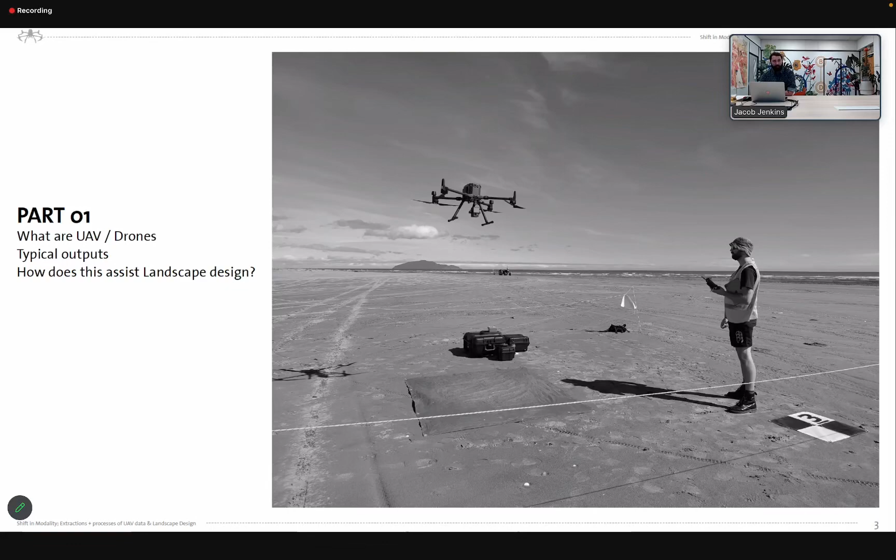So what is a UAV and what is photogrammetry? You'll probably see lots of pretty pictures of drones. These are some of the flying 'big boys' that I've used - a fixed wing drone that we used at previous work, all the way down to smaller Mavic units. So UAV stands for an unmanned aerial vehicle, more commonly known as a drone.

The drone has the ability to fly itself on automated, predetermined flight plans with given distances and heights at incredible accuracy, much more capable than us humans could ever hope to dream of. It can be instructed to do all of these things, and can capture targets for various outputs.

As I mentioned before, right from typical cameras, multispectral, which is basically a normal camera split into color ranges, more for plant work, and then right into LiDAR, which is light detection and ranging - a laser scanner which essentially allows much more detail than you can gather from photogrammetry. You can then convert these outputs into various 2D and 3D geolocated outputs useful for projects.

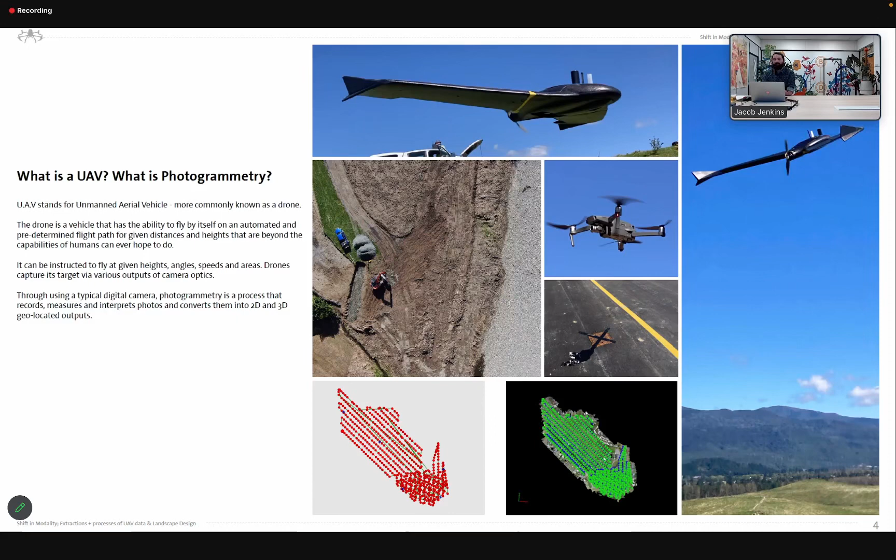So what is typically produced? From photogrammetry, you can see on the left a series of photos that are produced from the drone when you fly over a site. You get an orthomosaic or aerial map, very similar to satellite imagery, that's stitched together to give you an updated aerial view of your project.

You'll also get a 3D mesh, with various uses for that. Myself particularly, I don't personally use it too much, but if you're the kind of person who loves using meshes for various processes, that's very useful there.

There's a rendered point cloud - so in the name, it's a cloud made out of millions and millions of points, and I'm not joking on that, it is millions. They tend to be quite big databases, but hold incredible value of data, depending on what kind of modules you're using. It doesn't just hold color or RGB significance, the true color we see with our eyes - it can also hold other information, classifications of what's ground, what's tree, what's road, what's water, and other pieces of information such as elevation.

And then there's also DSMs or DTMs, digital surface models and digital terrain models. This is all mainly derived based off the point cloud through a series of processes that will give us ground surfaces and also just a surface in general. And then from that, we can also generate typical contour information, useful for representing mapping aspects.

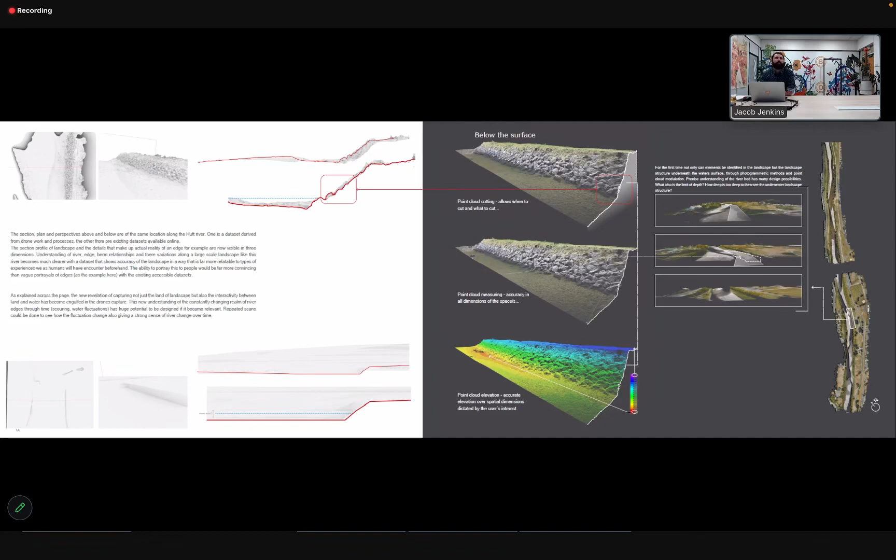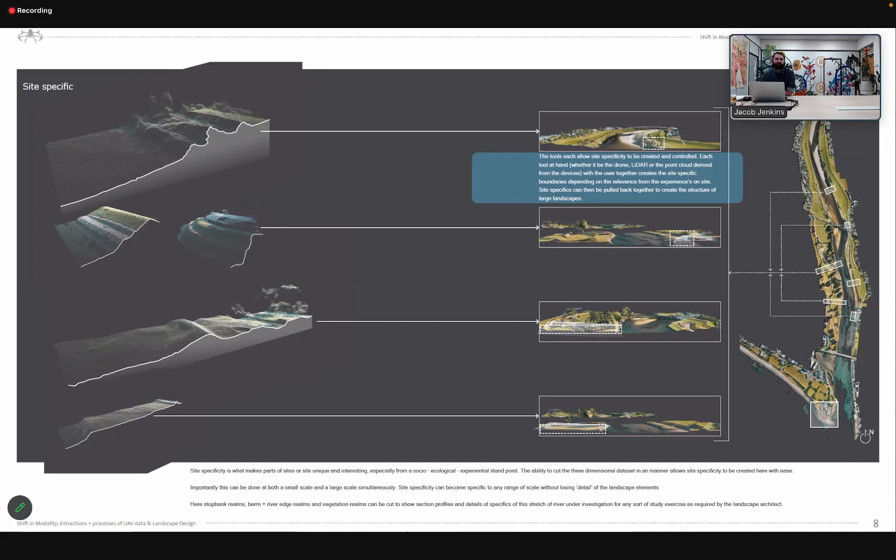So again, you can be very site specific. You can range from a large area right down to a small area of what you're particularly looking for, which means you can start to pull out some of the interesting bits that are particularly important for a project - could be landform, could be rivers, in this case could be riverside, experiences and qualities and various others. We'll go into further detail on how all those work.

So why drones, why landscape? I'd argue drones have been around for a while now and they've developed into highly sophisticated technologies. They have a lot of uses in various fields, as well as in landscape architecture. I would personally argue that the landscape discipline has a natural calling to the usage of drones. They allow us to capture and map the landscape realms.

Oops, sorry, the TV's warning it's going to turn off. I don't want it to do that.

As I say, they allow us to capture the landscape with mappings and 3D outputs associated with drone operations - easily an asset to landscape, point clouds, aerials, contour information, etc. So the majority of the time, especially professionally or commercially, drones and photogrammetry in landscape design tend to focus on visualization, because it's really good at doing that, and techno-scientific problems.

However, in contrast, I personally believe as a designer - and it was deemed a major tendency that occurred in the field of landscape - that the drone has the potential to assist understanding large landscapes and human life on the ground together. Large landscapes are really difficult undertakings to wrap your head around.

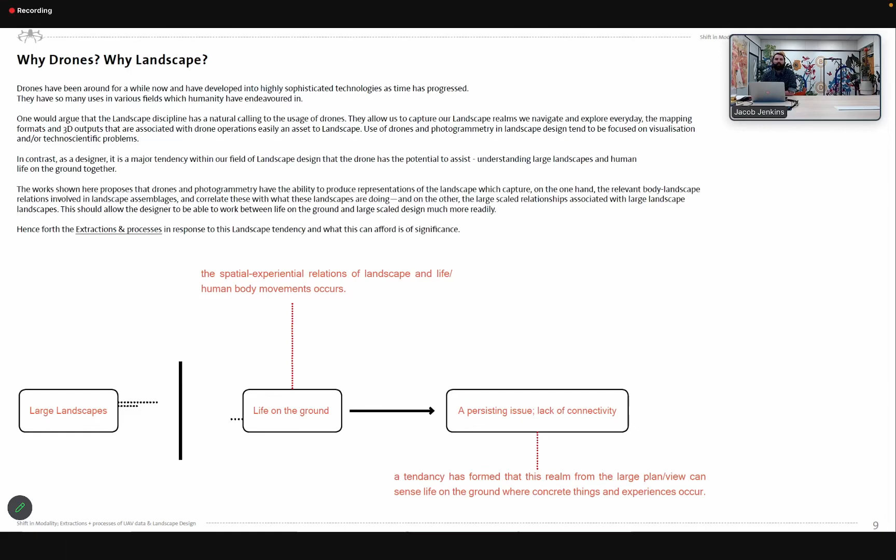So, is there another way? That was a key query when I was looking at this for my thesis. Something that will tackle the difficulty of understanding and forming mappings and representations of what happens on the ground, but for large landscapes. So is there potential for drones to do this?

The main value that the drone has is its ability to do both the small and the large. You can fly and survey kilometers of area within a day and have all of that data in aerial 2D outputs, 3D point clouds, etc. But you can also zoom into the finesse of the details, so you've got the ability to zoom between the two without losing accuracy and detail.

So critically, it's how can we then take that data and explore it with other conventional methods in landscape architecture, both analysis and design, to utilize that.

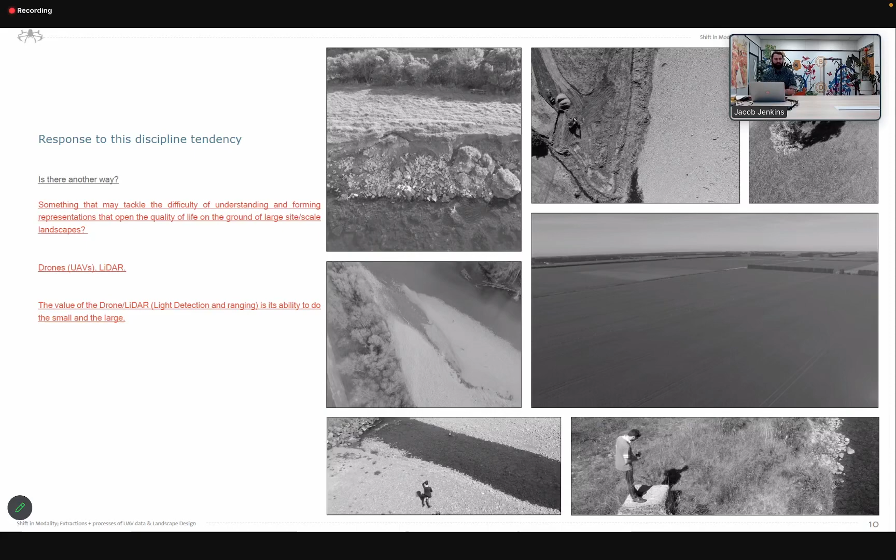So you might be thinking at this stage, it's all just pretty pictures and lots of clouds with points on it. But the main thing here is how the data from the drone can be extracted in a meaningful way, from what we extract from landscapes, especially dealing with the large and the bodily scale. So the following slides show a handful of extractions and processes that I think were pretty critical in understanding the site at hand, which I'll go through shortly.

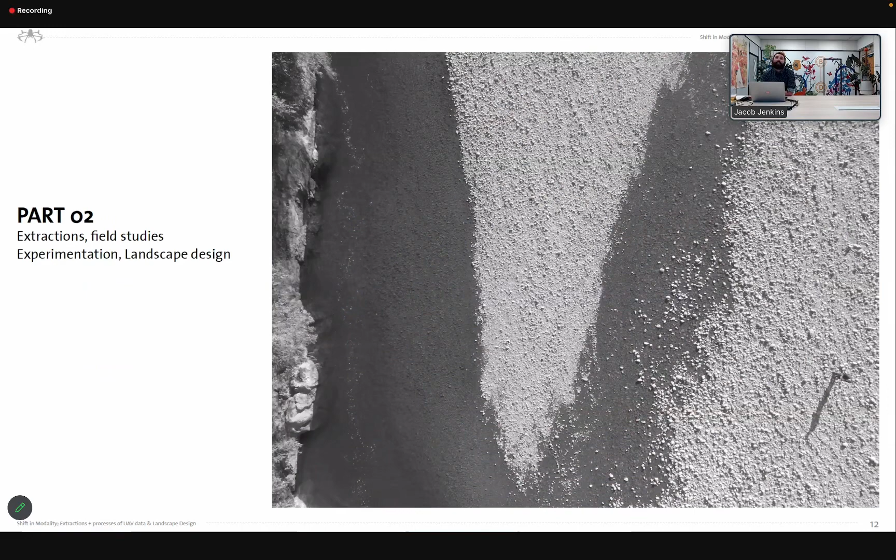So, part 2: extractions and field studies, followed by experimentation and landscape design. This is kind of the meat of everything here.

So the site that was chosen for this study was the Te Awa Kairangi, or the Hutt River. It's a braided river based in Lower Hutt and Upper Hutt, about a 10 and 20-minute drive north of Wellington. It's a massive riverscape that is used by lots of people every year.

If I recall, I think it has 1 million cyclist users every year because it's part of the Hutt River Trail. So this is a serious space where a lot of people use it as their escape from the city and suburbia, to get out and about.

So why riverscape? Riverscapes are large pieces of landscape that we experience on a daily basis. They incorporate both big and small scales, as it's a space that is consistently changing with vegetation, movements, bumpy things, technical aspects, flooding, spatial areas, ecologies, and a general change of movement over time.

It just seemed the perfect site to really start testing whether the drone would assist in understanding these nuances of river scapes, the pulls and shifts of the landforms, things like trees and rocks, views, orientations - those really bodily related items.

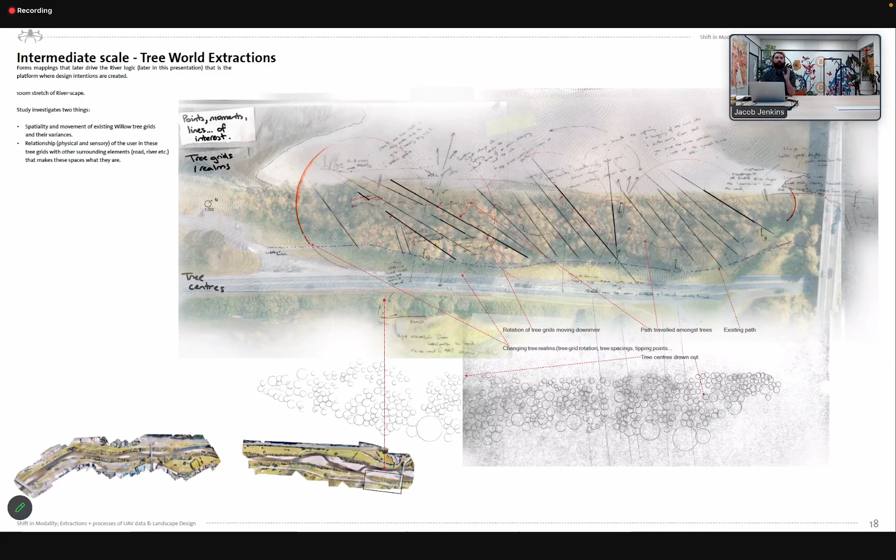And so that, together with typical standard field studies, usage of photos, diagramming, understanding where the edges and shifts change, actually started to reveal some typicalness of a certain kind of tree world, grid size, angles, etc., that made a certain kind of movement through those spaces.

So you can see here, there's the edge of the trees on the riverside. Only here the river can be sensed, and it was very rare that the river could be sensed purely by itself, because things like the road and other aspects were highly dominant in this kind of space.

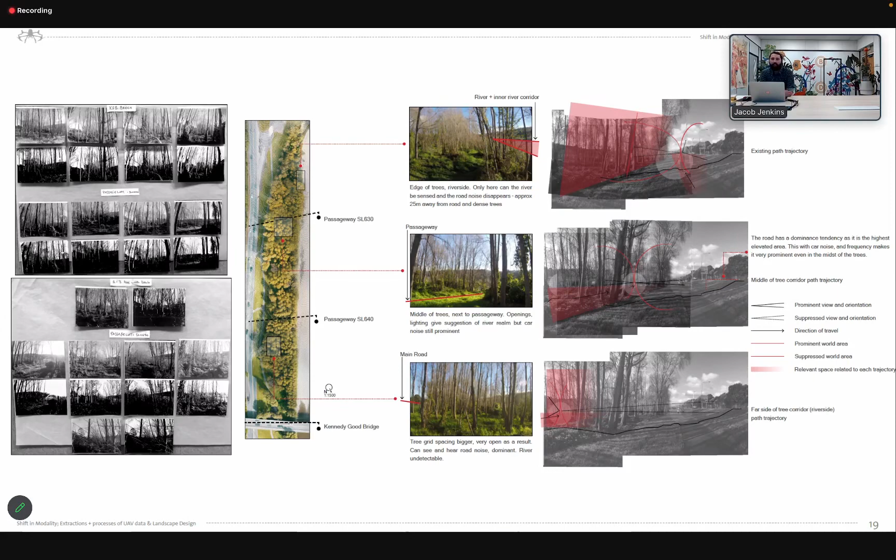So it was because the drone data detail allowed us into that. It helped us step into that world and actually start to extract those key things of what it was that made you, as a user, move through these spaces and what you got out of it.

So you can see on the left, the high detail that the drone imagery was gathering - each individual tree, canopy shadows, and the size of canopies, etc. You could start to feel where the clusters were tight and where there are openings. Whereas on the image on the right, the trees are much more grainy because the detail and accuracy just isn't there to the same level.

And so you'd be assuming much more in this example. So it was that ability to take the detailed drone material and start blending it in with field studies of what was being extracted from experiences, understanding those tree grids and worlds, and then trying to move it up to a larger scale to utilize what the drone data was giving, as well as what I was understanding this landscape did.

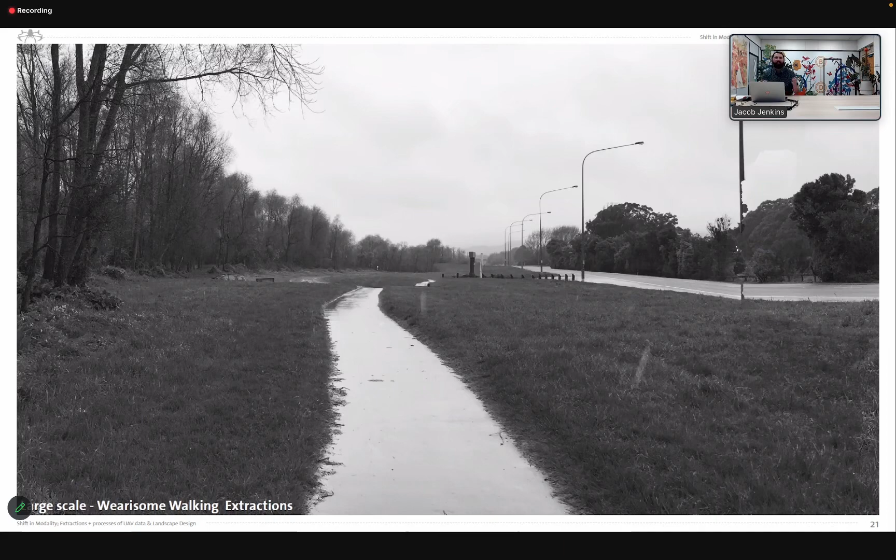So this is called the Wearisome walking. We've walked this space various times - I don't know how many kilometers Sean and I have clocked doing this - but this is one image at one end. As you can see, it's very standard: it's a pathway, there's some berm either side, there's a main road at 70 km/h, so it's a very dominant roading area. And you can see the path just gently meanders along - nothing really changes, trees to the left, road to the right.

Generally, you form a generalization that it's just the same all the way along: path, road, a bit of landform on either side, and some group of trees.

But what this was trying to understand was this wearisome kind of walking. You start to understand that the dominant road to your right-hand side is really there, noise channeling away, with a group of trees sometimes really thick, so you don't get a sense of the river. So you suddenly become autonomous, turning into an automatic mode as you travel down this space.

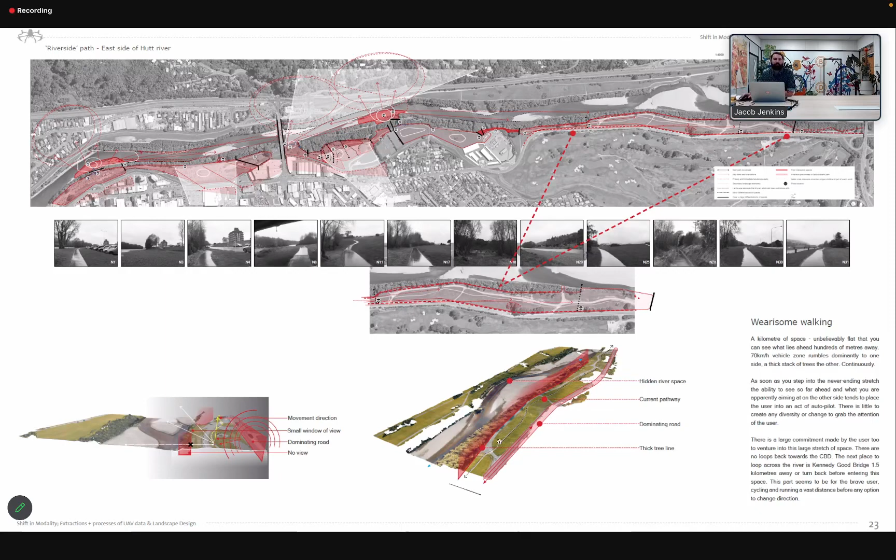There was more to that space that it could tap into to understand. There's the current pathway that meanders gently, with subtle shifts in the landform that move along, and the drone data helps pick that up—more useful at the design stage, which I'll go through shortly. But the drone material is also useful at a large scale, just to assist understanding those gentle topographical changes.

You can see with the point cloud 3D output here, it works as a great base to start diagramming over the top at that larger scale, pointing out that most of the time there's no view through to those tree areas into the river, but there are those subtle shifts in the landform. Understanding those subtle shifts—the landform moving just enough in height—means the noise of the road decreases significantly, and your senses activate more to the river or other aspects of it.

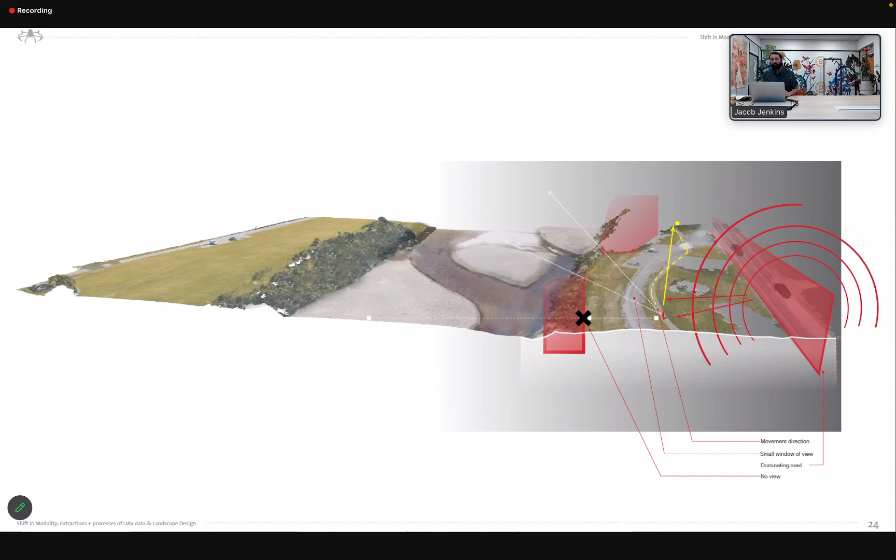So it really helped to diagram and show this at the larger scale, but also to undertake a similar process to the example beforehand, using the highly detailed information from the drone. Again, extractions of passageways, main grid tree angles and distinctions between them—where the trees would tighten up to a point where there was no way through to the river, or spread out enough that you could perhaps walk through, though it would be tricky, right to the point where it's really easy to walk through those spaces, or it's actually inviting to come down there.

You have passageways which are clear-cut alignments to the river, offering a moment to the river rather than the road and other things around you. It's about trying to extract all of those, but also understanding it by actually going through those spaces, documenting it with photos and diagrams. There are these moments of: can the road be seen? Can the road be heard? Can it be sensed? And can the river also be seen, heard, and sensed?

There are all these tipping points of certain tree grids, the densities, the type of trees, the length of grass you're walking through, the ground surface texture in general—that level of detail of the things around you that make you move through these spaces in a certain way, dictating how you move through that space.

Through these processes that were tested out, it became clear that the detail of the drone material, the clarity of textures, elements of the landscape at that bodily scale—trees in this particular example—were really a winner. It really helped extract those understandings of how those spaces seem to work, which would be crucial moving into the design.

But it's important that it doesn't do it just by itself. It's the integration of drone material and field studies, on-site experience through that spatial and temporal time, usage of photos, sketches, mappings, diagrams—anything that helps assist extracting the elements you're looking at. In this case, it all added up to extracting the logic of how this riverscape worked—the extraction of why and how the user experiences the site in a particular way—and that kind of bodily detail could then start to be understood over a large scale.

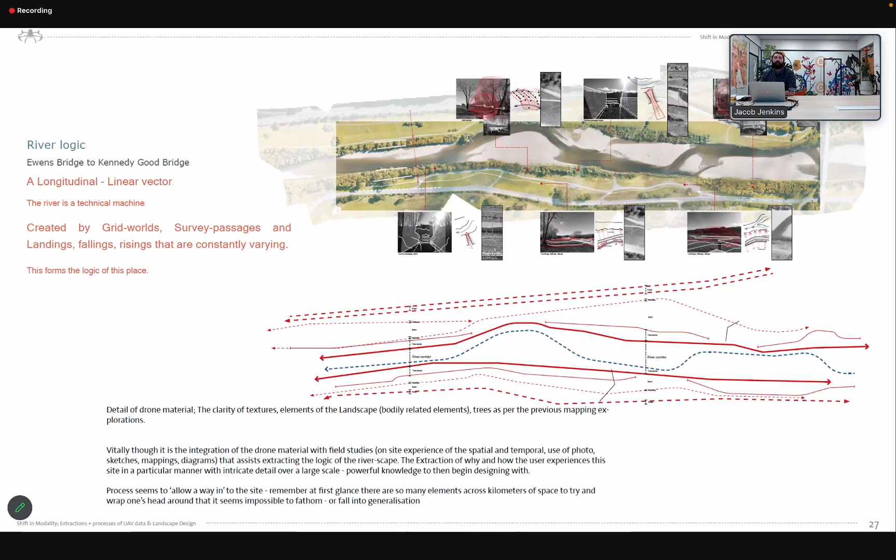But yet, moving through them in a spatial kind of aspect, they do create something. And so it's actually helped extract those out, and figure out what forms this place from a spatial perspective, not just a technical one.

So this was just kind of taking all of that and asking, okay, what's the design query? How can I play with those experiences? How can I really start to tweak and pull things like earthworks, those subtle shifts of what the landform does? How can I push them so it's quite contrasting, really starts to control someone's movement with earthworks, with trees, path movements, edges, stop banks.

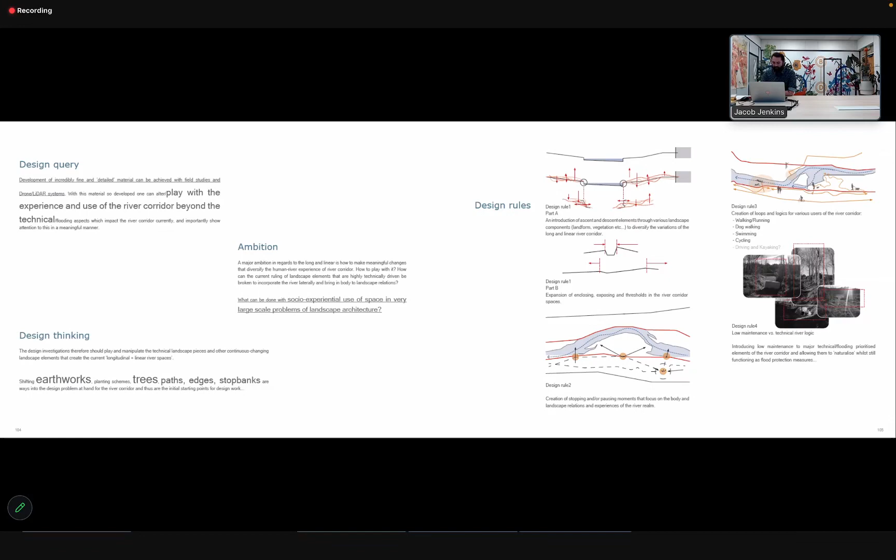How can it take all those things that have been extracted and put them into a design method? So, hopefully I'm not losing you.

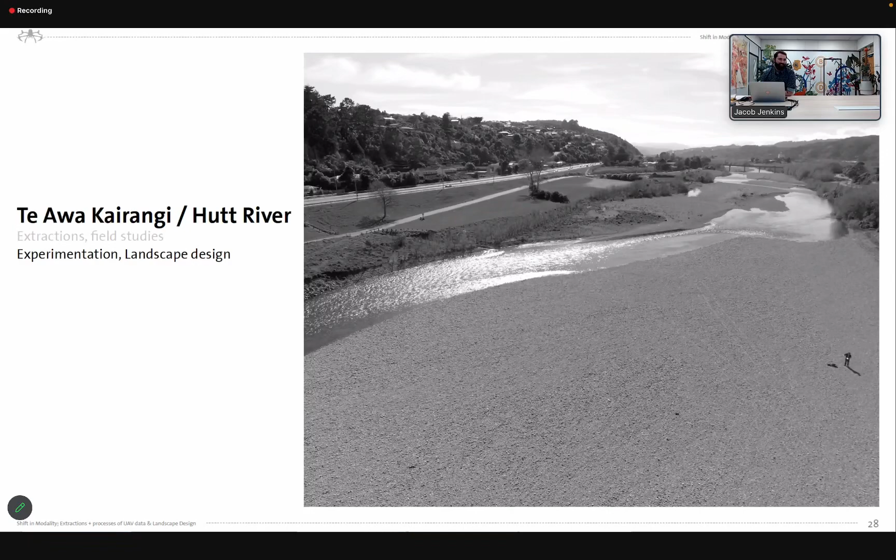So how is this drone useful to design? I will admit I did hit a bit of a wall when I was doing the thesis work at the time—it was really useful data for analysis work in particular.

But it was, how could it then take all this high level detail of information—contour information, surfacing, and things like that—and make it transformable? It was quite a more difficult thing to try and understand how to do, and then actually do.

So a mixture of digital softwares, plugins, and scripting helped shed light on this. Software at the time just come out, a Grasshopper visual scripting software based called Bison, which worked in with Rhino 3D. It was a landscape manipulation tool. I'm sure there's more and more now these days—this was almost 4 or 5 years ago, and the visual scripting and AI tool sets have already come a long way. I'm sure there's probably lots of other ways to do this now, which is really good.

So this tool allows you to flip the current standard or traditional method of grading and shifting land. It would normally come down to 2D sketching and drawing, then taking those on paper and putting them into 3D to do some testing. What this allowed was, instead of doing that, you could move straight into 3D.

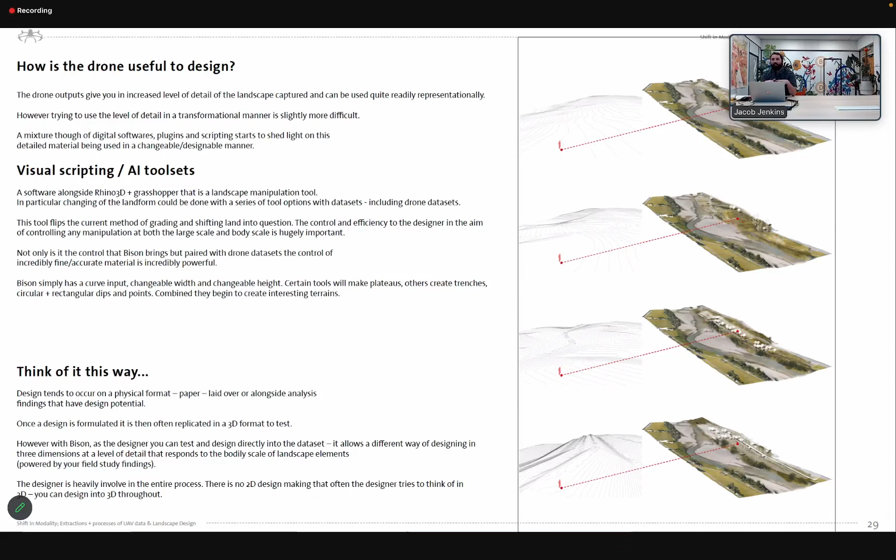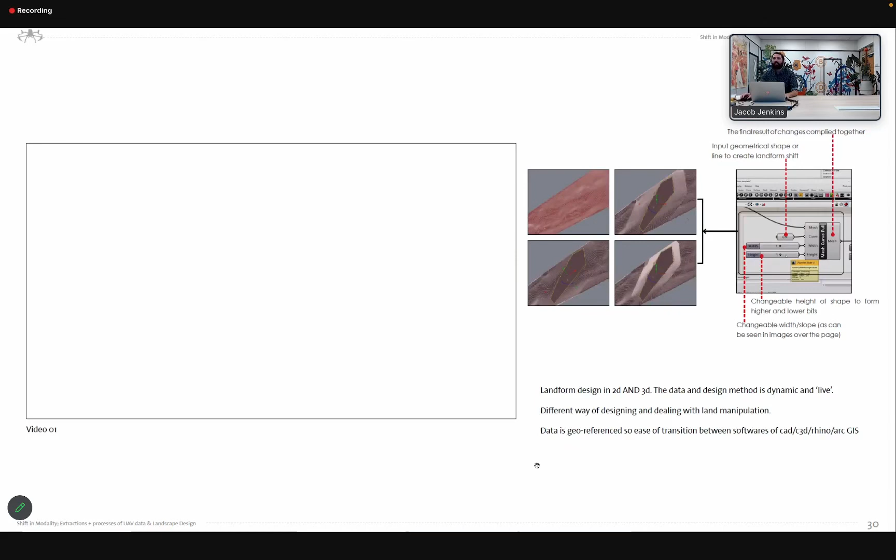So this is just an example of what the scripting could do. A landform could be designed in 3D—it's dynamic, and it was a different way of designing and dealing with land manipulation in particular. So I'm just going to jump to the video.

If this works. So yeah, this is just a little simulation of what it was able to do.

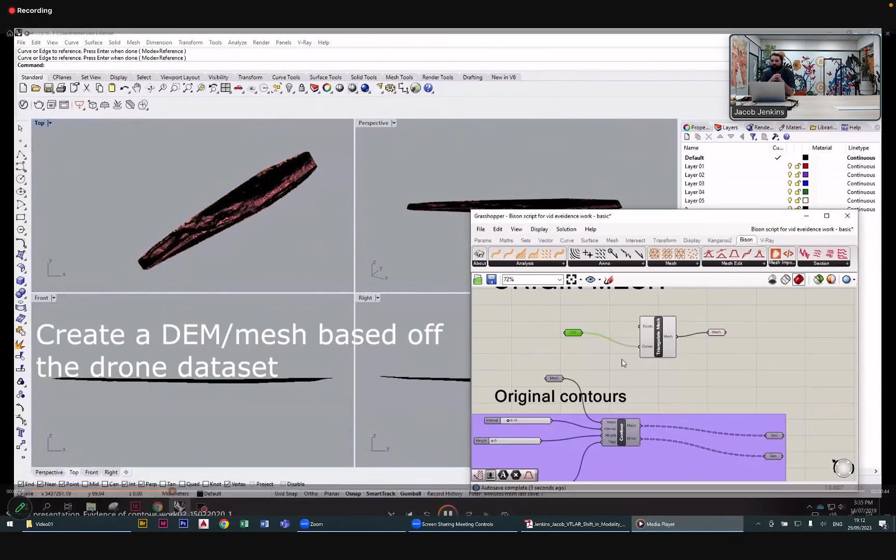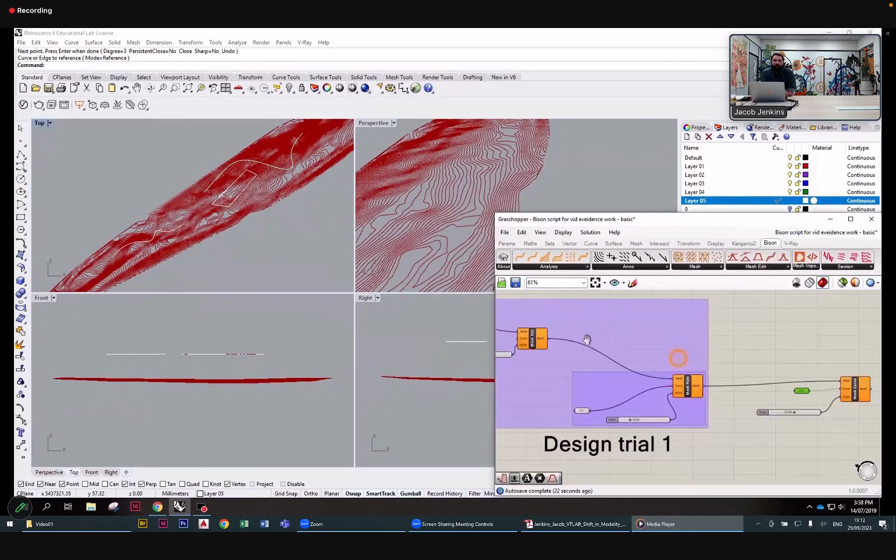So that's drone contour information, I think at 100 mil intervals. We're talking really highly detailed, because it needed to be almost flat, so really detailed in its changeability, that data that was sparser wouldn't pick it up. And so then what we had the ability to do is, through these various tools, moving and shifting landform in a certain way, you could push and pull the landform, or the contours in this case, to start driving different aspects and possibilities in the landform.

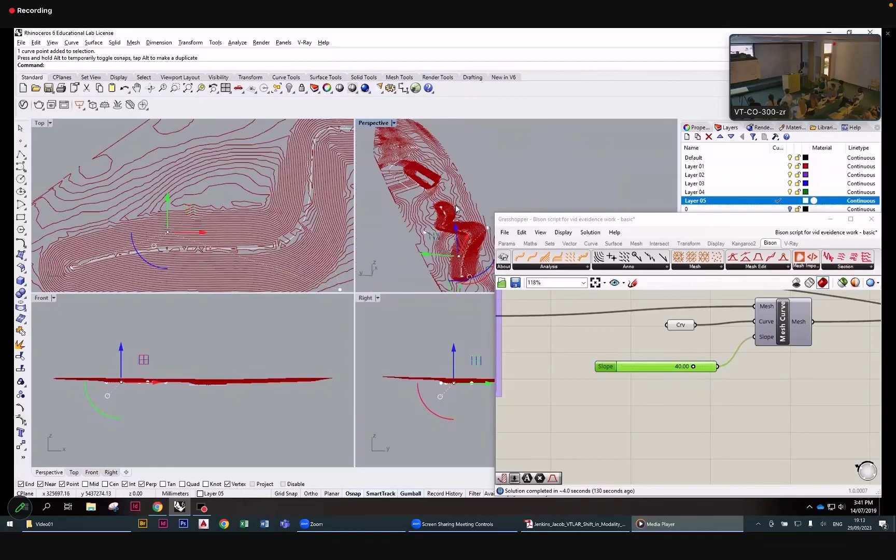So you can see there, starting to pull and push things with path alignments. You can make plateaus, divots and all sorts, and you can control that by saying, I want something to be 5 meters wide, 10 meters wide, or 3 meters high down to 1 meter high. You can be extremely precise with your movements and what the landform can do.

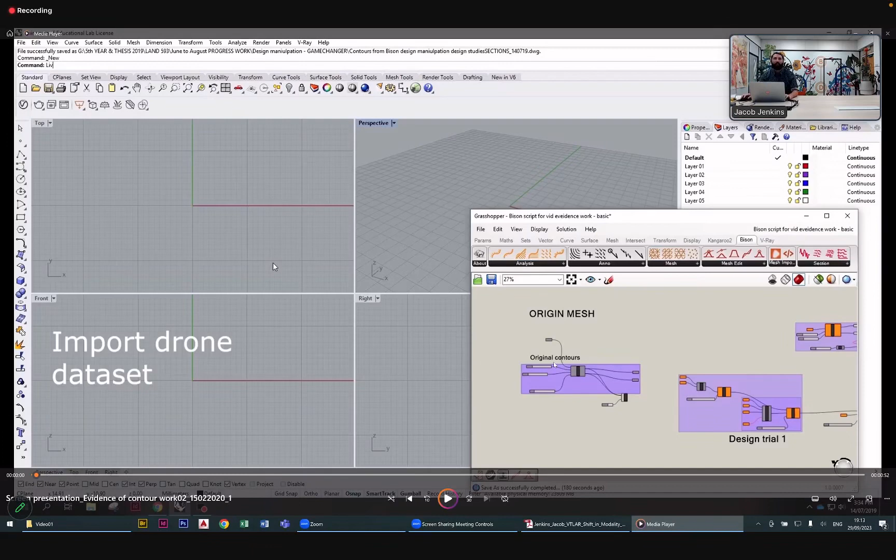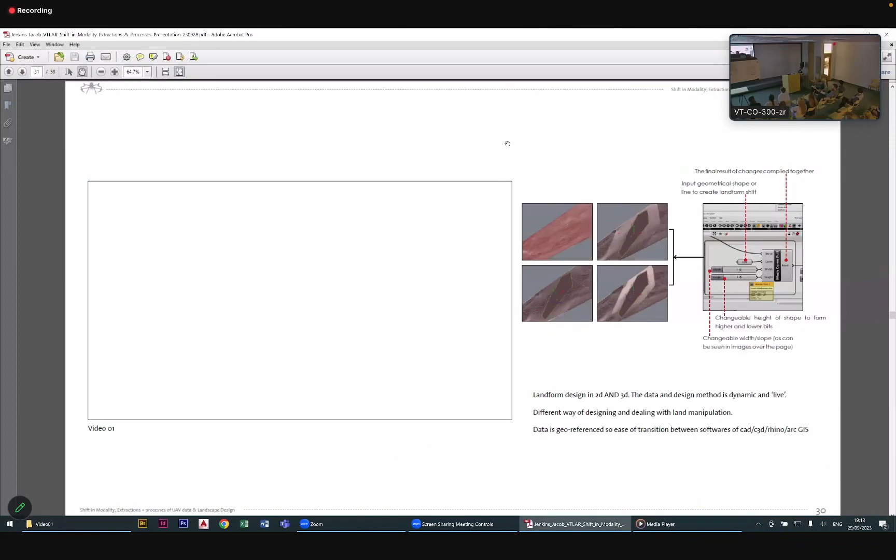So what that software process allowed me to really get into and interrogate, especially being drawn from the field studies that I did as well, is that this is all a series of design testing that was efficiently done.

So this is looking at the changeability of the red block on the right hand side, which is that dominant roading where cars are coming through. It's loud, it's noisy, it's not a particularly nice part of the landscape there to be in.

And it was actually starting to tweak the landform in such a way that, depending on how far away in terms of the x-axis, were you then at a point where that wasn't really a dominant thing to you anymore, or also shifting it in the vertical aspect, moving it up 300 mil, 800 mil, a meter, or the opposite, coming down into the landform, kind of really started to allow, these are all the potential outcomes of this.

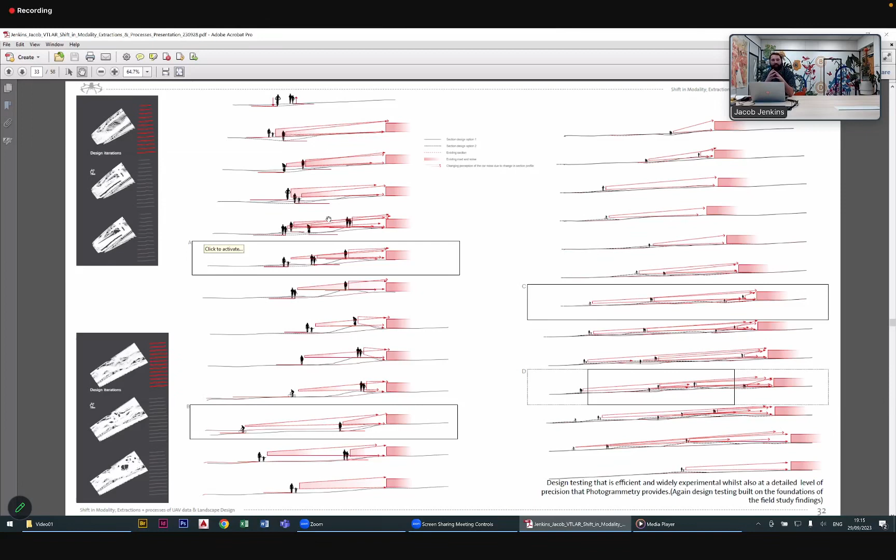And so it allowed a real power to very quickly, efficiently do these. So these are all just 3 iterations quickly pumped out, basically, as part of this testing. This could, if I recall, was done within a matter of hours, rather than days and weeks. And so you could then really start to understand the little nuances in these subtle shifts.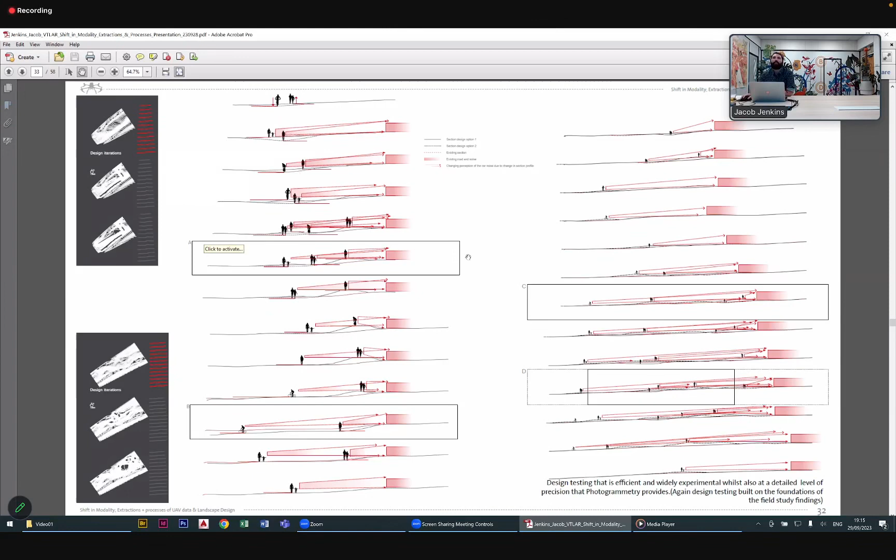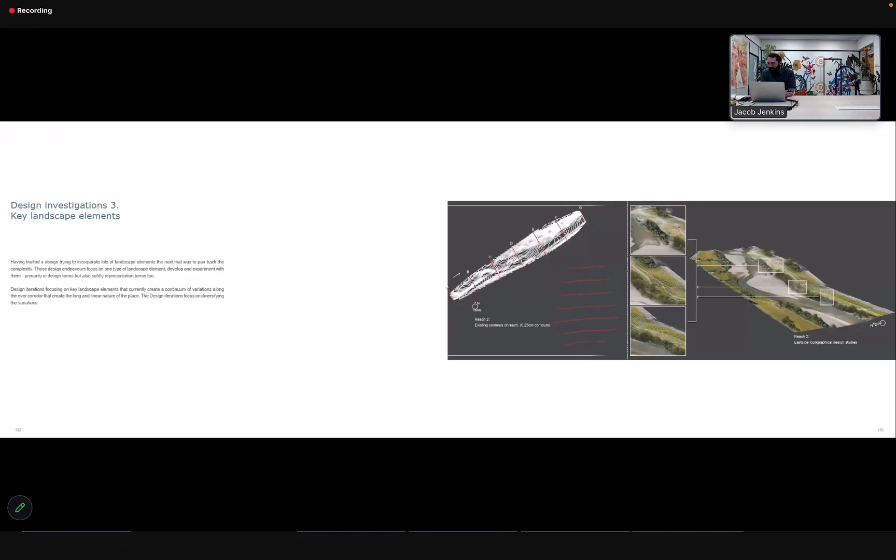Let's make sure it's... So these are some of the wider design investigations. Oh yeah, 35 minutes, sorry.

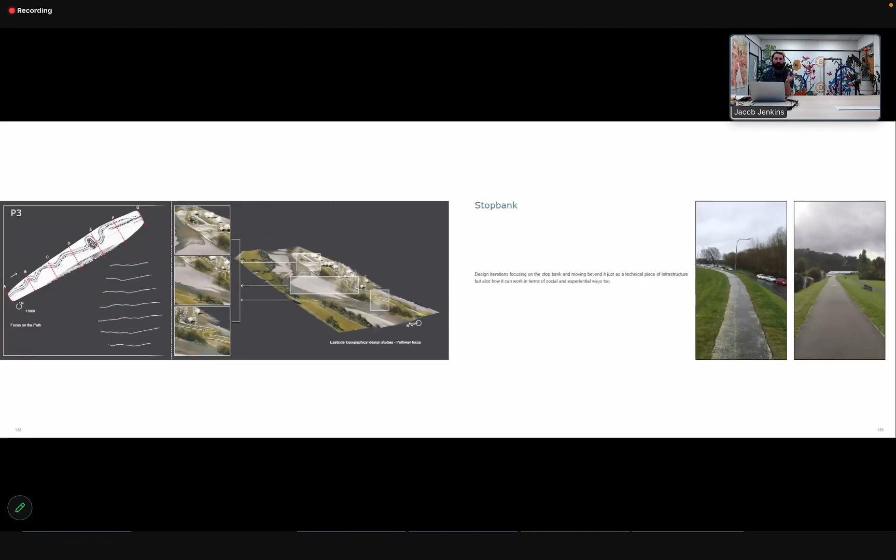And so this was then looking at those testings, what the landform does, and using the drone point cloud as a basis image. The contours are also based off the drone, and looking at how it works from a path perspective, stop bank perspective, and general landform. And this then kind of came together as part of the collective outcome, looking at the final design overall, which really dragged in the tree information, contours, landform shifting, etc.

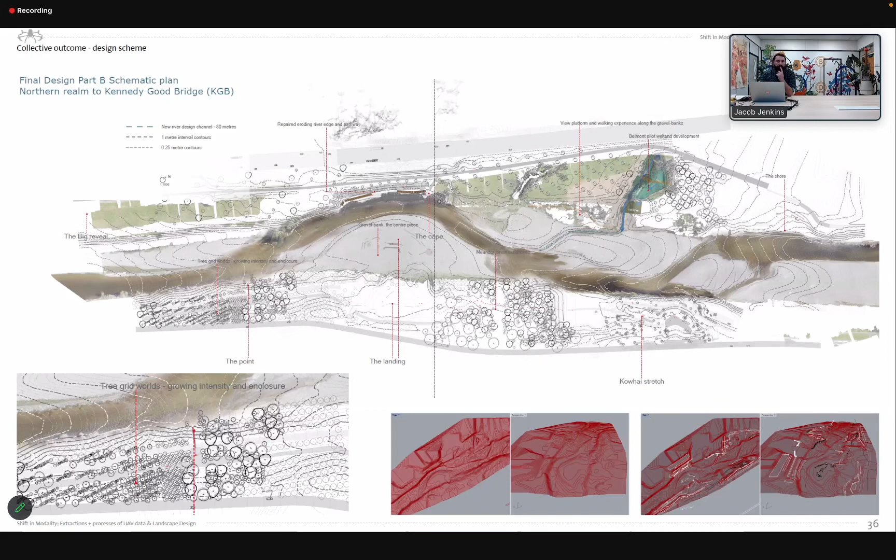And so this is some of the section work that really came from this. You can see some of the tree explorations, how that kind of came through into the design, and why and how those grids would strengthen up. They'd really tighten up to create really intimate experiences, and then open wide out when it was the right time and place to open out to the river.

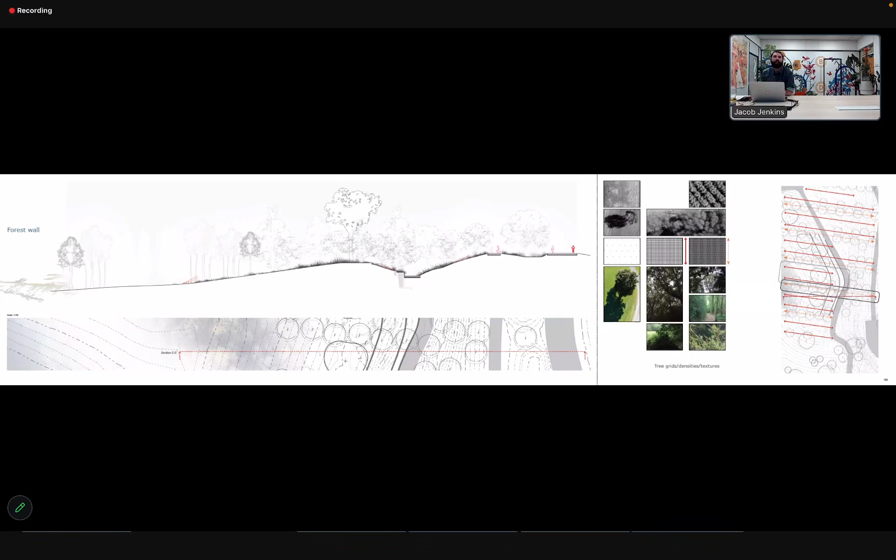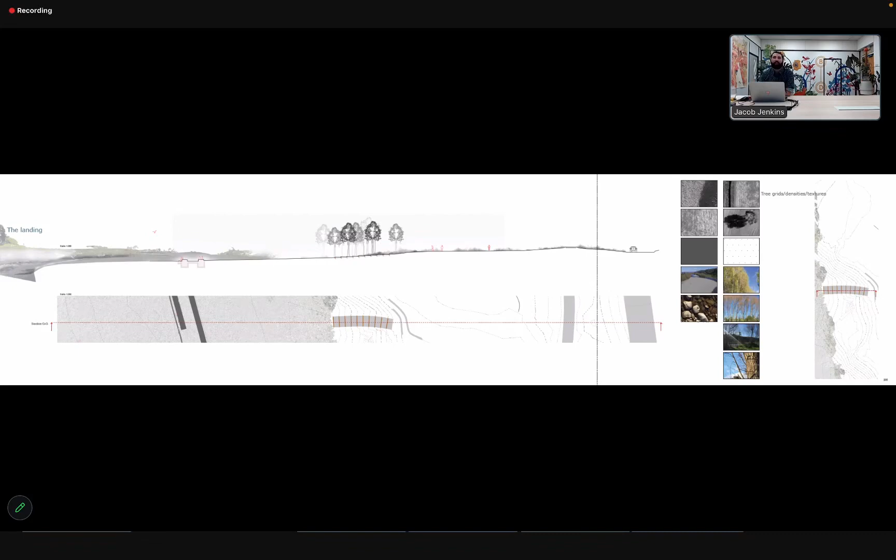So this one being here, where a gravel bank, there's this really beautiful view opening out. And so here it seemed only to do justice to minimize the amount of trees, gentle manipulation of landform, so the car was nowhere near as dominant, and the river took the place.

So these are just various cuts through, and again that's just some of the processes through Grasshopper as well. So it's quite a meaty script.

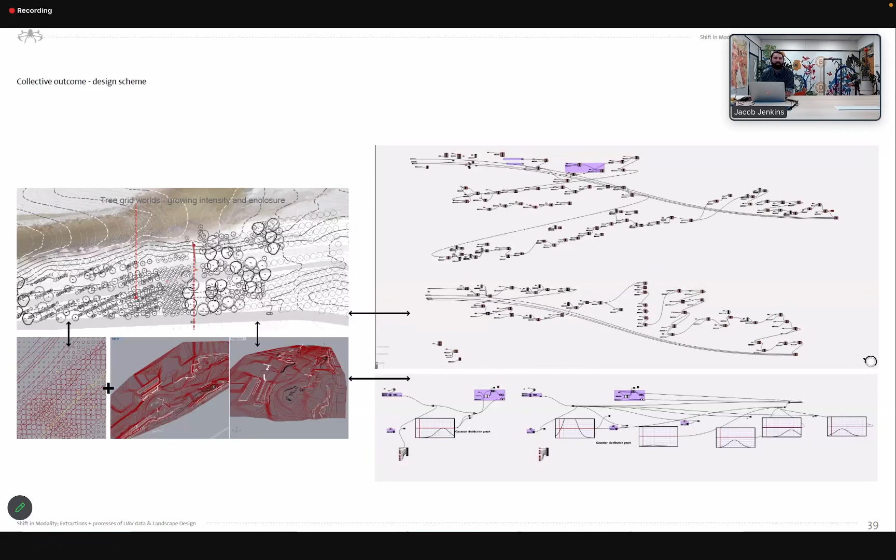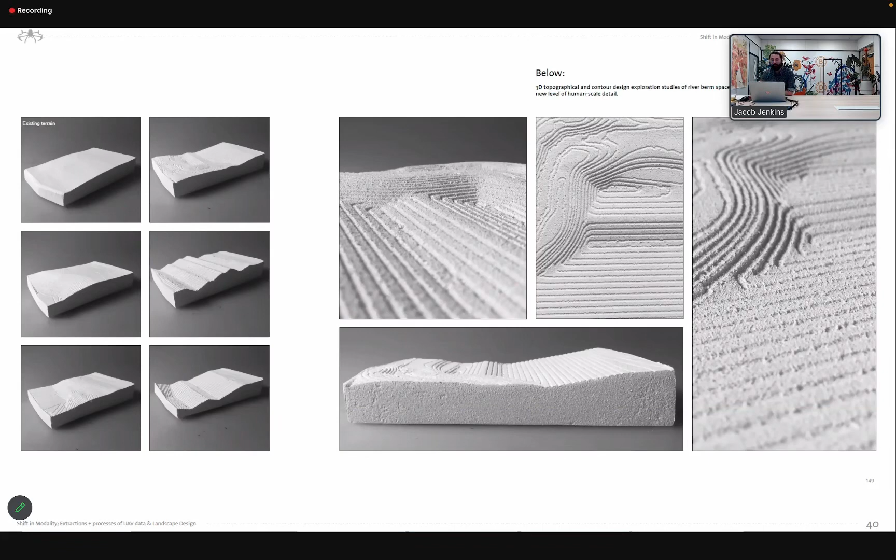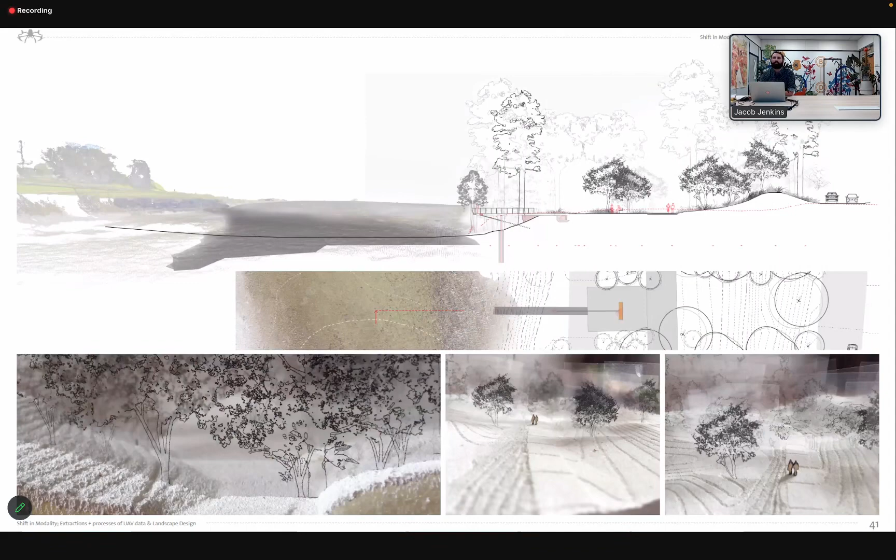And again, some 3D model outputs were really useful too. Understanding it and actually physically holding it in your hand and looking at the contour information really helped try and understand those subtle shifts, but what they do over a large scale really makes a big difference. And so you can see the whole kind of thing coming together there.

My apologies, I haven't been keeping an eye on the clock. So I'll just quickly go through some commercial applications. In the commercial aspect, you don't have the luxury of taking time looking through research like that - time is money.

I've had some intriguing examples, like a project on the Te Awa Kairangi - seems to be attached to my life, that place. As part of the design for the council, we were redesigning a 2-3 kilometre stretch of river, trying to give it new life. It was 3 kilometres of path, trees to the left, a berm and embankment to the right - a constant, boring but also dangerous space where cars were using it at the time.

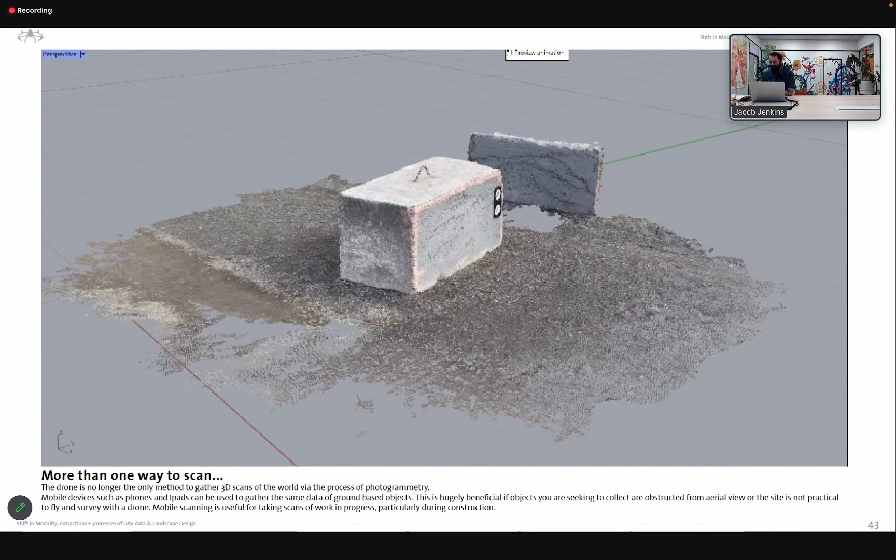Scanning came into effect for this project, not just at the drone scale - we did a full scan of the site for aerial information and base topography, but also scanned some concrete blocks that are part of the technical machine of the river. We decided to utilize these items on site that weren't being used, not just for the technical aspect but spatially, extracting raw elements of this technical river and bringing them into the landscape design itself.

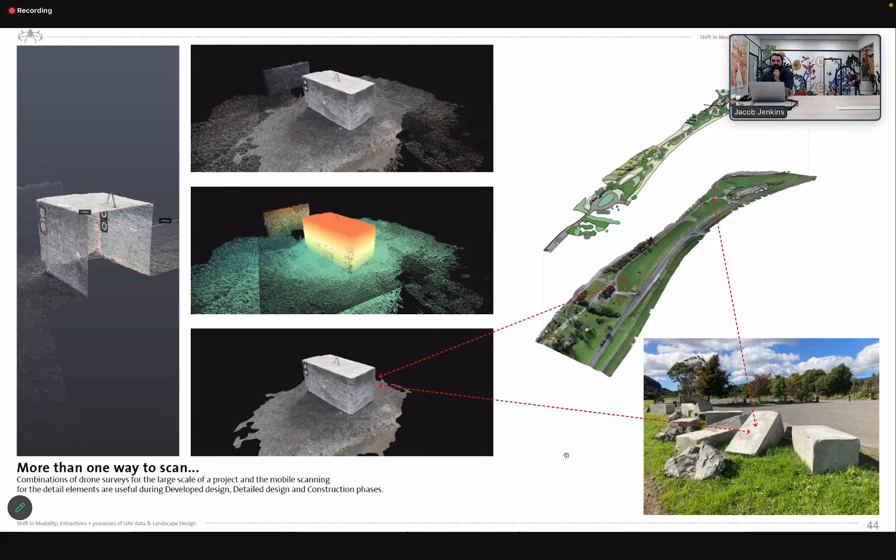This block was scanned using the same process as the drone, but with a mobile device. It went from sketch through to model input in Rhino, looking at what we could do with the design, then extracting that exact element through the Revit process, and then into reality. It came out pretty well, I think.

This rotation block design was originally based off the point cloud model we extracted. The crucial thing is, because it's accurate in its relatable elements, we could take accurate dimensions off the block from the scan, which informed the model in Revit, based on real life. So when the real life things came into play, everything more or less lined up straight away, because those accurate measurements from the scans helped us get it right the first time.

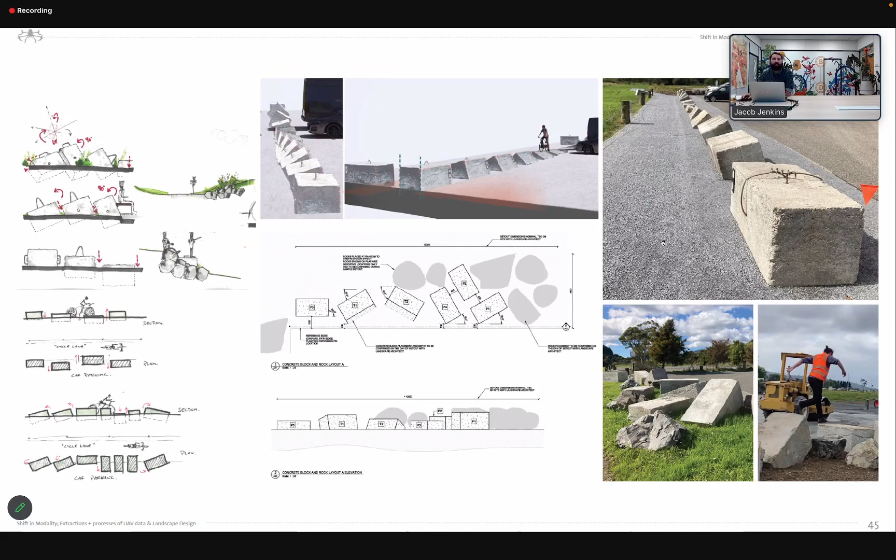I'm not sure if that one's going to work.

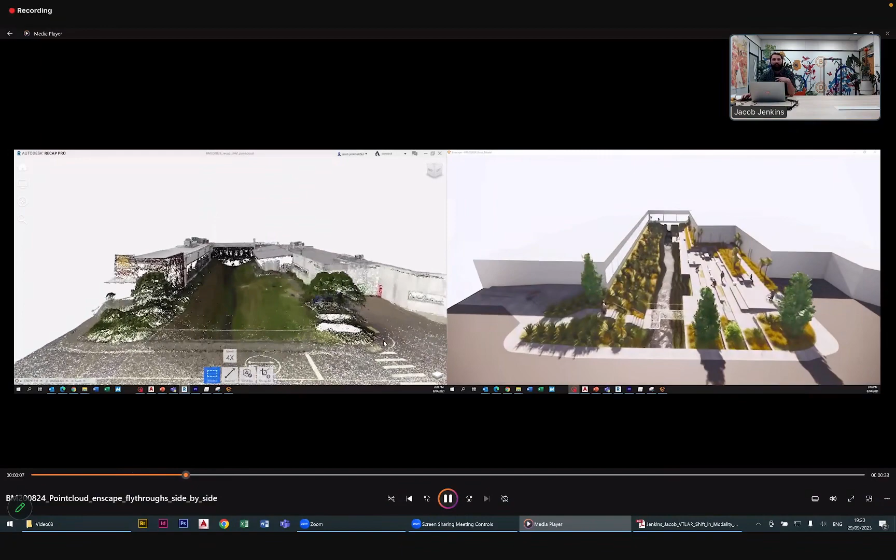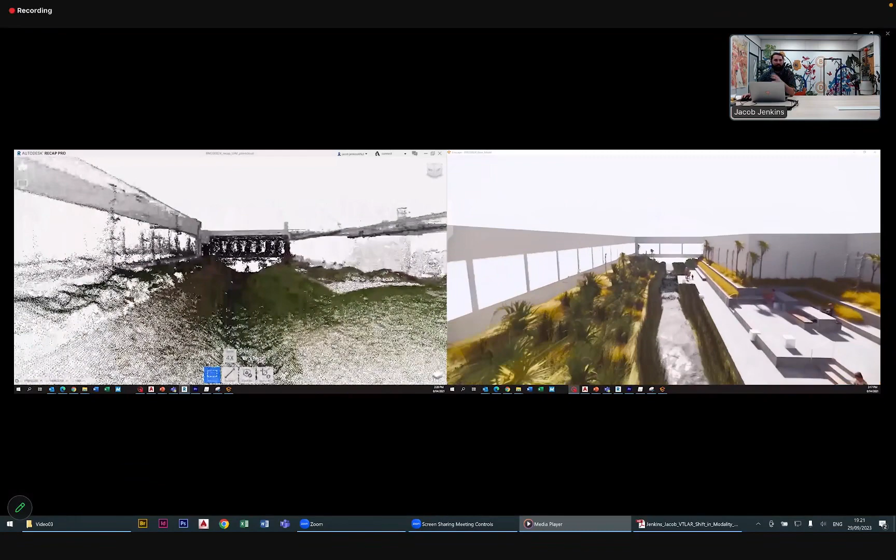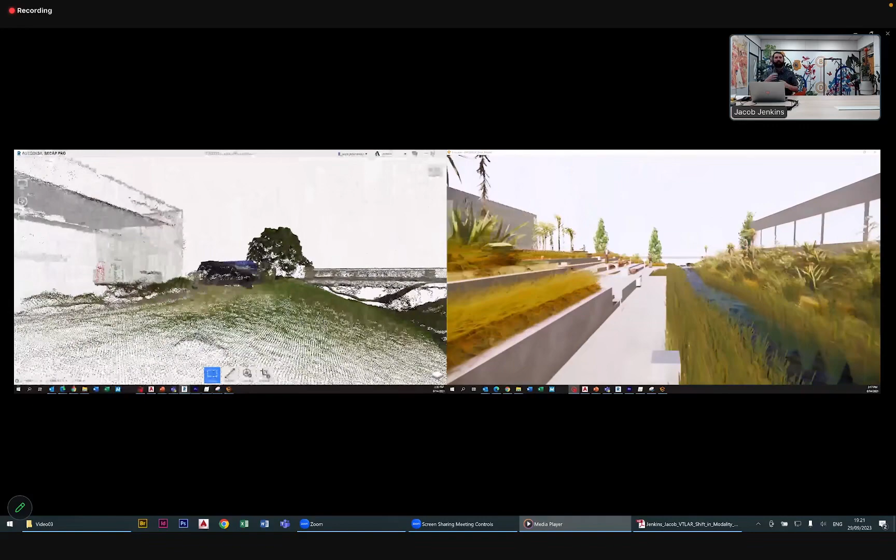This is a scan from some of my colleagues used for a design. The UAV drone point cloud is on the left for a stream, and on the right is the concept my colleague came up with for the space. That entire space on the right is built off the point cloud on the left - they used all the elements, angles, slopes, expanses of space, based off the point cloud information in the design. There's a direct link of using the raw material as a base, which derived the design intentions my colleague came up with. That was really useful to see how it originated.

I'll show that video at the end if I have time.

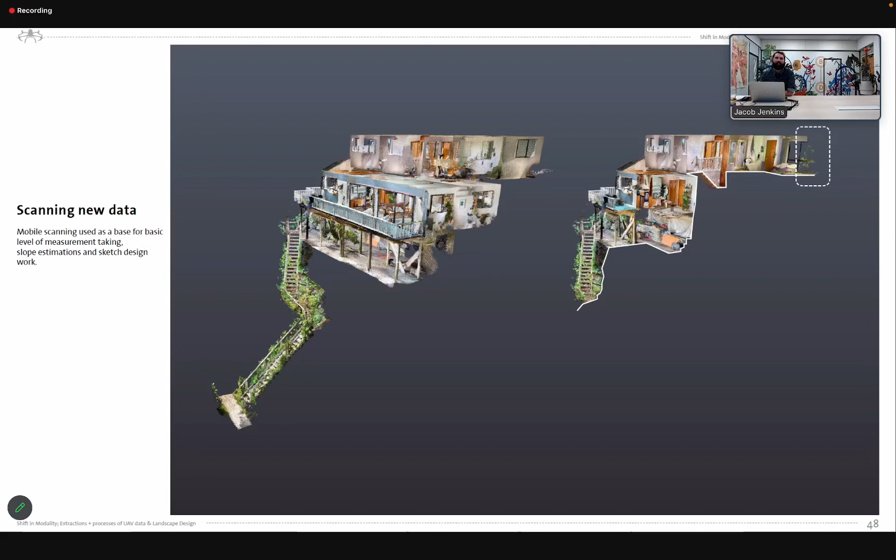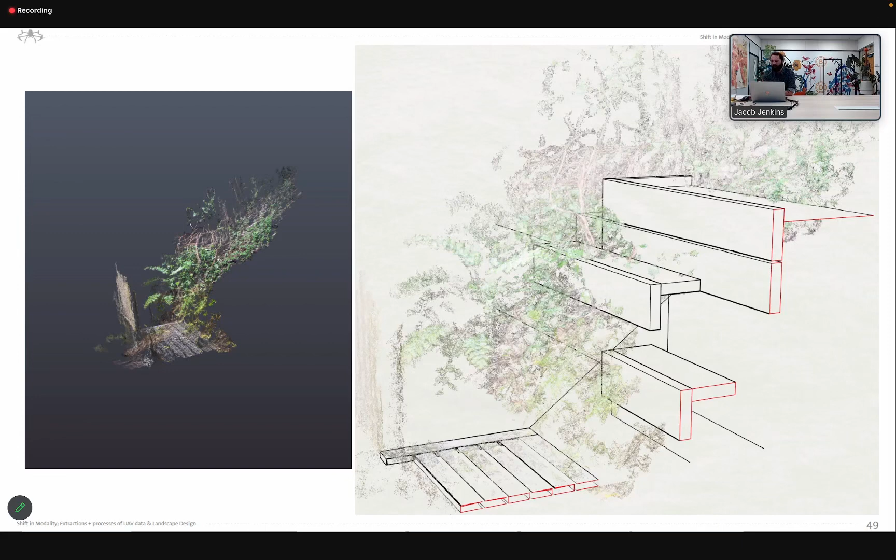This is also all mobile scanning, not drone scanning - scanning data of areas that had never been scanned before. This is for my house back in New Zealand. It allowed me to understand what I had at the time and create a data source for things to come. We're looking at designing the back of the house where it's very steep terrain, but there's no decent survey data out there for this tiny spot. So it gave a basis to work off, just to understand how it could potentially be terraced. It's by no means highly detailed, just indicative, but it gave me a base to start understanding how to make an interesting space out the back.

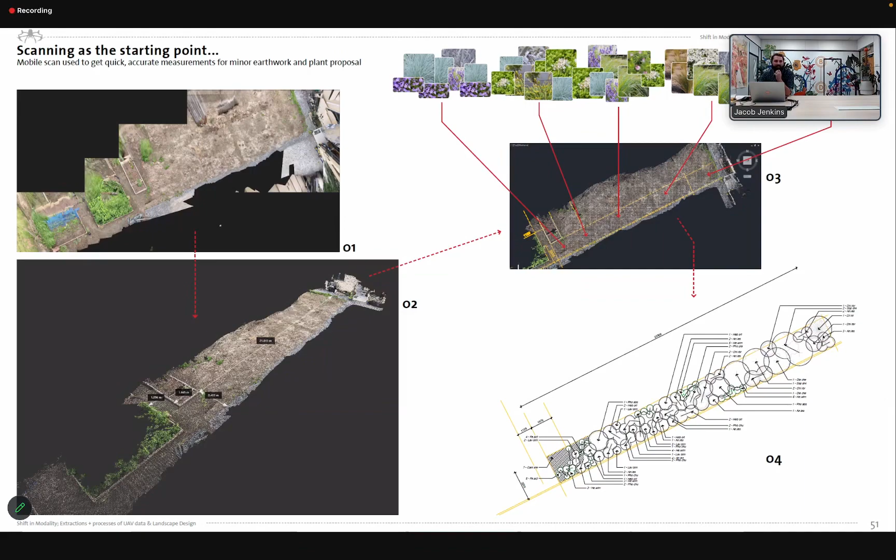You can see the dog helping out there with some planting, and it ended up being really, really successful. It was quite efficient, meant my father didn't have to do too much digging or additional work, because he knew exactly how much he had to dig based off the areas and what the point cloud data extraction gave us.